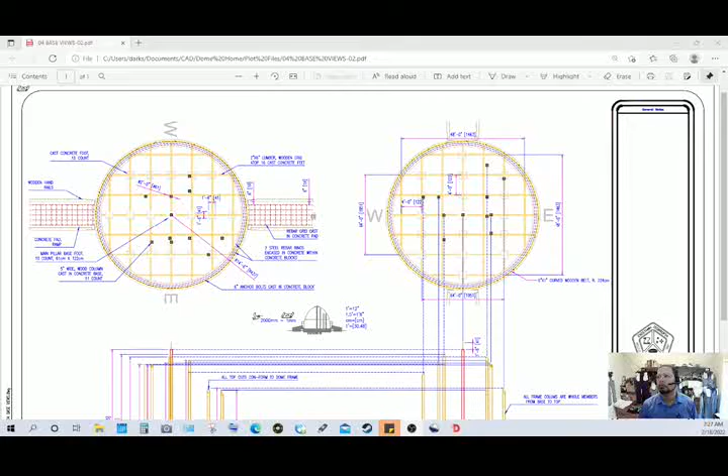I'd like to discuss today sheet number 4.

Sheet number 4 is very, very important because it contains the foundation, the base, as I call it, of the structure. And it begins to basically take a look at the...

...architectural and engineering aspects of the design of the drawing of the structure, and this is, I believe, where you begin to look at...

...the very building concepts, the various building concepts that will enable you to build this dome.

As you can see, it has a top view or plan view in two directions for reference purposes, and it has two side views.

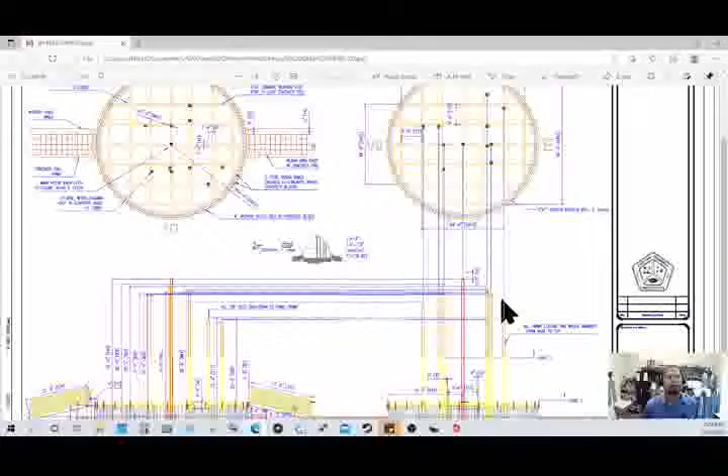I have lined up the pillars or the columns. These are the main pillars. I have provided lines there for reference,

so you know exactly what pillar is being referenced at any given point. I believe that to be important.

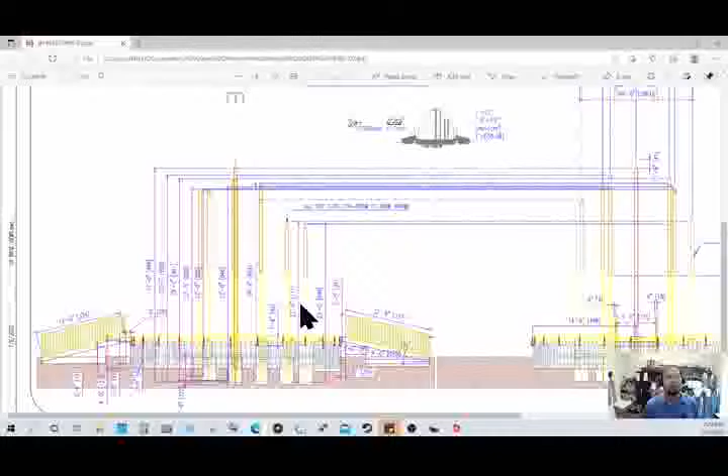And as you can see, there are only two side views. I did not go ahead and, like other sheets, provide four sides, four views. I don't believe that's necessary. Two views from two sides I believe to be...

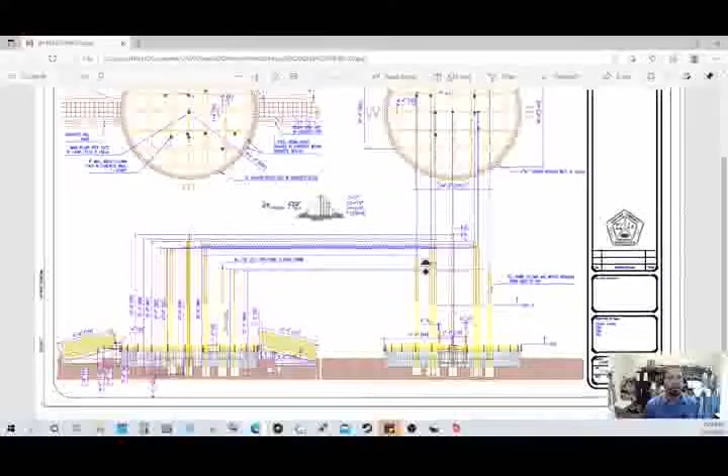...plenty enough for construction, for review, for analysis of these plans. So we'll begin...

...taking a look at this aerial view, or top view, or plan view of the base, what I call the base. Some other people may call it the foundation.

And as you can see, there is a grid here of about... the dimensions are here provided on this side.

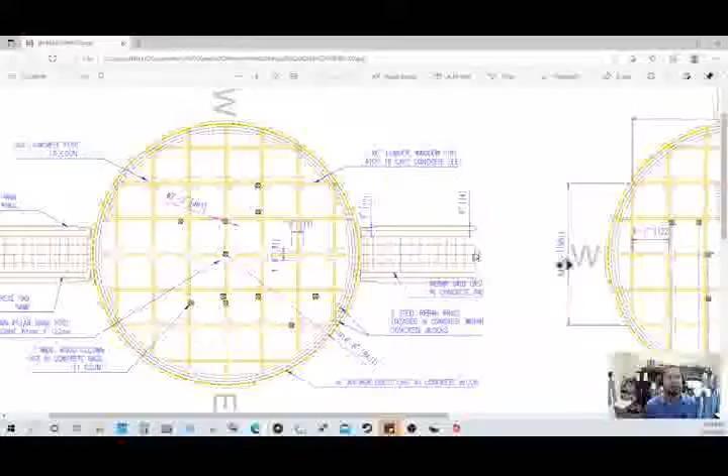4 foot, or 122 centimeters, by 4 foot, or 122 centimeters squared. So it's a squared grid.

And the reason I chose to do that instead of a more fitting polar array of members...

...is for the ease of construction with available materials. Again, I designed this dome to be as accessible for building and construction to the most...

...variety of economies, people, economic levels, to the largest variety of people.

Therefore, I attempted to maintain simplicity as much as I could in the areas where I could.

So I did that on the inside, beginning with the floor framework. These are 2x6 lumber, or designed to be 2x6 lumber. Of course, there could be other fitting material.

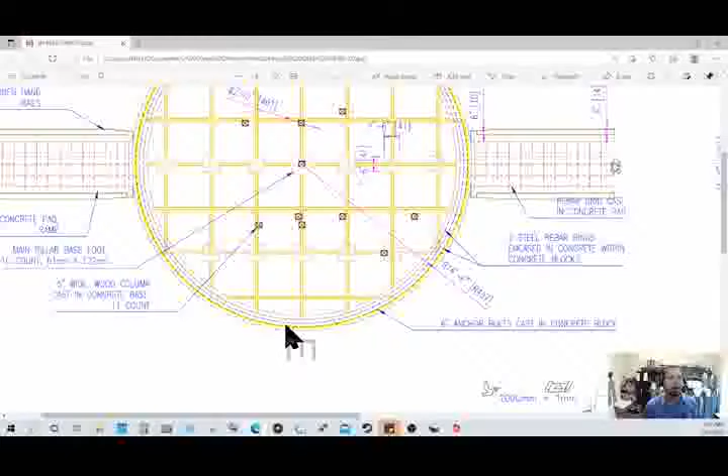And again, as you can see, they overlap into these blocks, this array of blocks, which I discussed earlier. But these are an array of blocks all around the structure.

I'll show you here in this view what they look like as viewed from the side. They're laid flat on the top.

If we take, let's say, one, and they're laid or erected up - these are two blocks, and this is another block laid flat.

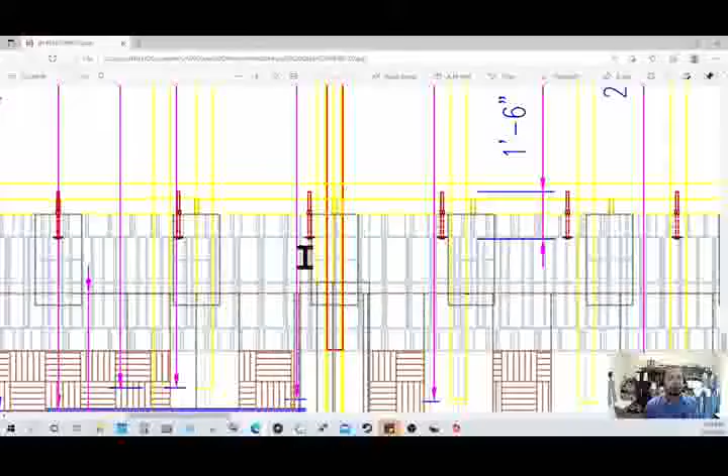If you look at the side, you can see more or less what those would look like when arrayed in that fashion.

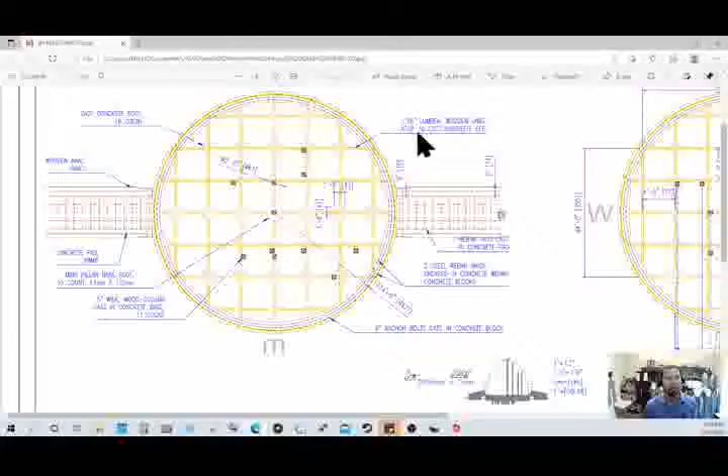And of course I detailed what these are: 2x6 lumber wooden grid atop 16 cast concrete feet.

I call them cast concrete, but they are actually designed to be blocks arrayed or stacked on top of each other - 8 of them, 4 on top, 4 on the bottom.

But they also could be cast concrete - that is a choice. As you can see, these overlap and rest on top of these, as well as each one of these.

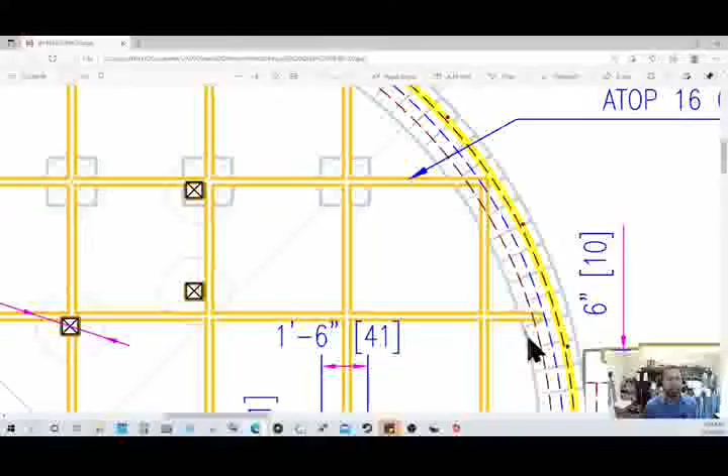These threads rest here. There's a small problem here that I need to fix. This needs to extend all the way up front. I believe it didn't because of perhaps the entrance, but I don't believe that to be necessary right now.

I think with the design, the changes I've done, this could rest all the way here, just as these do.

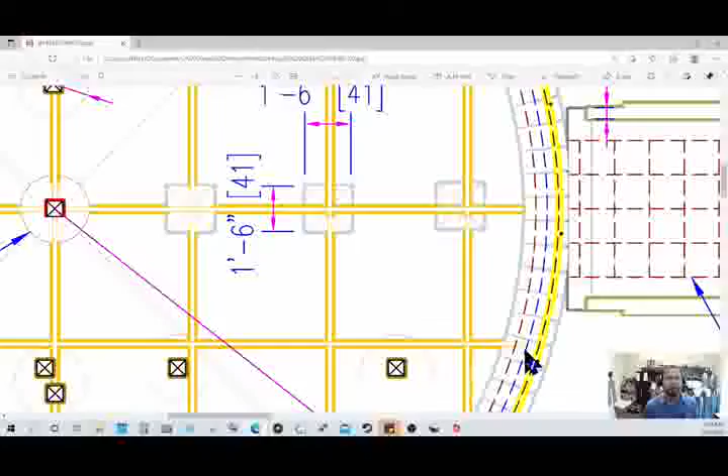And again, you can see the different columns or pillars. These round feet, bases, as I call them, are the concrete...

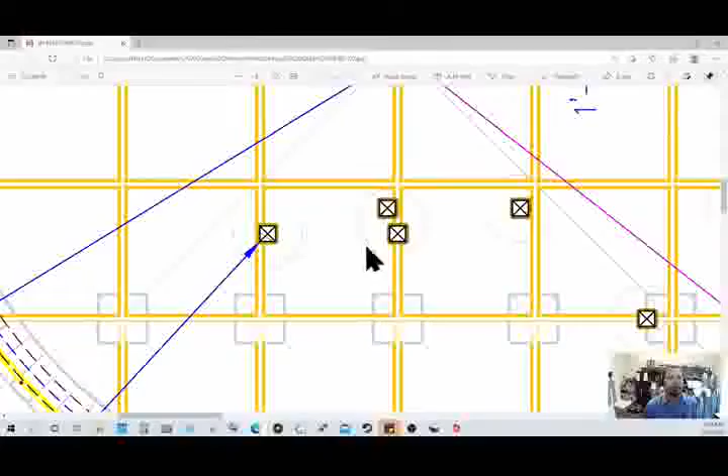...footings or feet. These large ones here...

...that go deep into the ground to provide for stability.

Again, these provide stability. As you can see, they are buried in the ground entirely, with the exception of the center one,

which is this one that goes - I believe there's a mistake here. It should go all the way. Actually, it does show as going all the way to the ground level.

No, more than the ground level. It should go all the way up here in line with this. So this is actually an error, a drawing error that needs to be corrected.

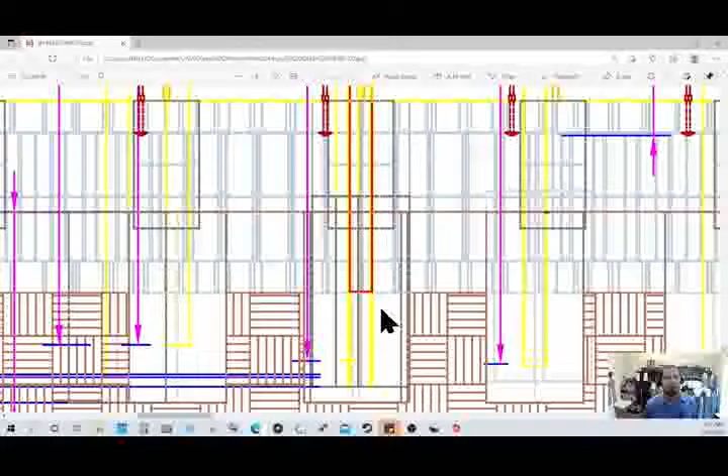This center pillar that supports this one member, the center one,

should be going from this depth all the way to this height, flush with...

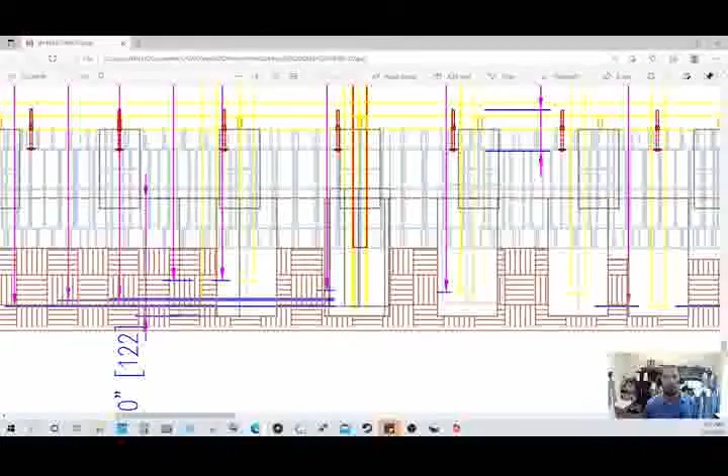...these smaller blocks or feet. And again, that's something I will address here shortly.

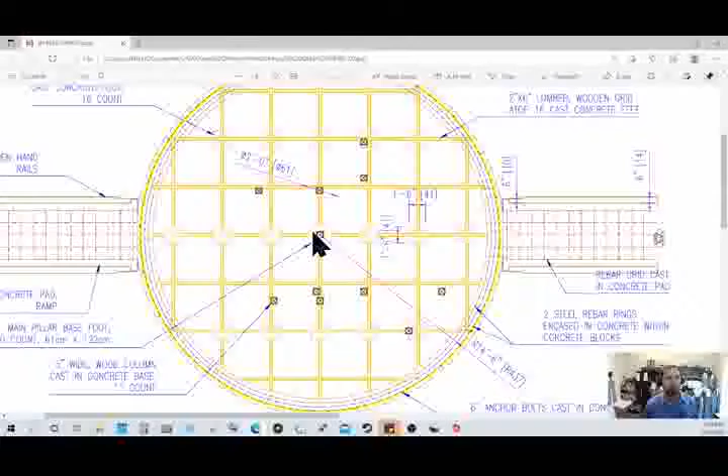And again, that applies only to this footing, because as you can see, the grid, the 2x6 lumber grid, rests on this as being replaced for one of those.

There's not one of those, so this takes the place of one of those. So these are going to be resting on that.

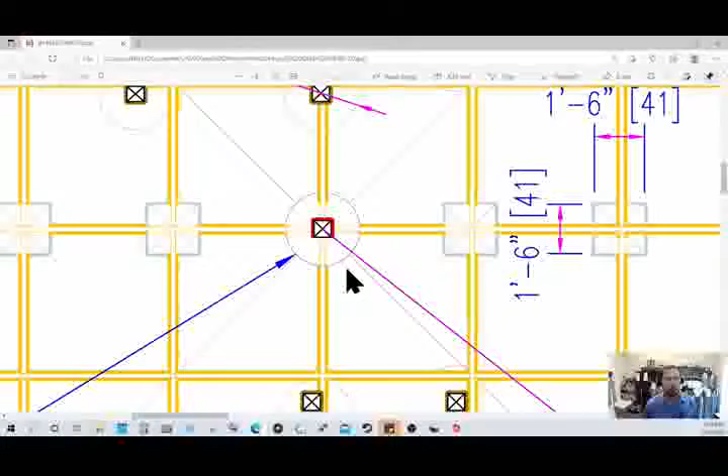So it needs to go all the way up to the level that these are, and all the way down to the level that these are, down on the ground. The very bottom should be at the level that these are.

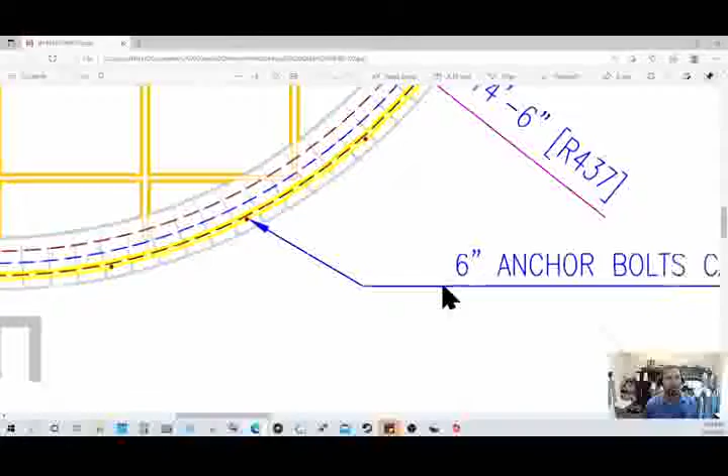These right here represent the bolts. I put them as 6 inch, but they're not 6 inch. They are about 6 inch plus 8, which is about 14 inches.

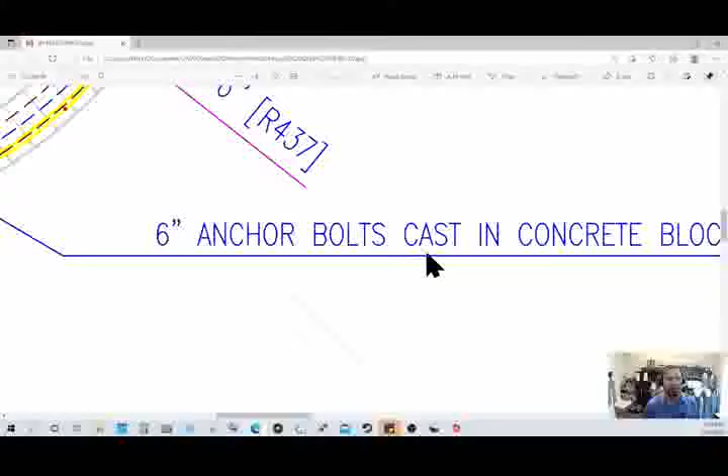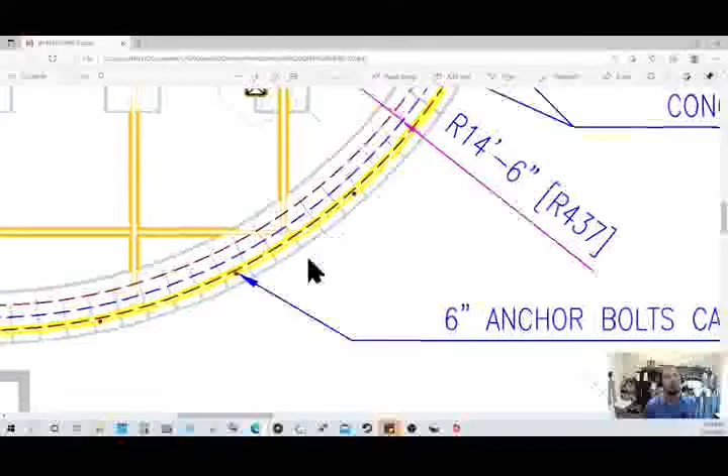So this is another error, another mistake. These are actually 14-inch anchor bolts cast in concrete. Actually, they're not cast, they are inserted in a hole or bore provided in the concrete and tightened with a nut and washer, perhaps also a lock washer. I believe there are about 24 of those.

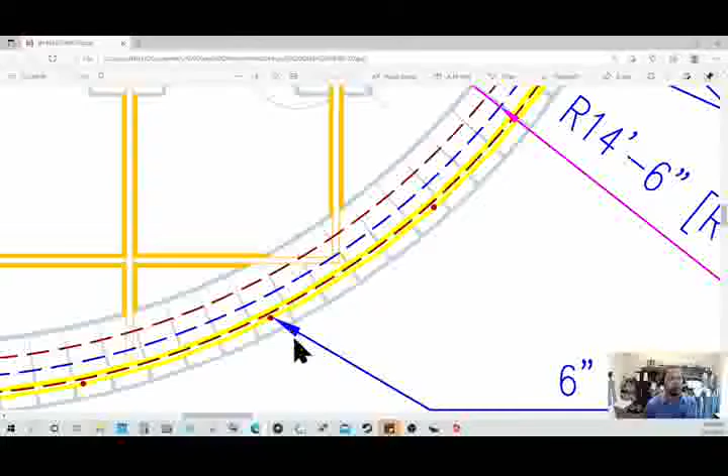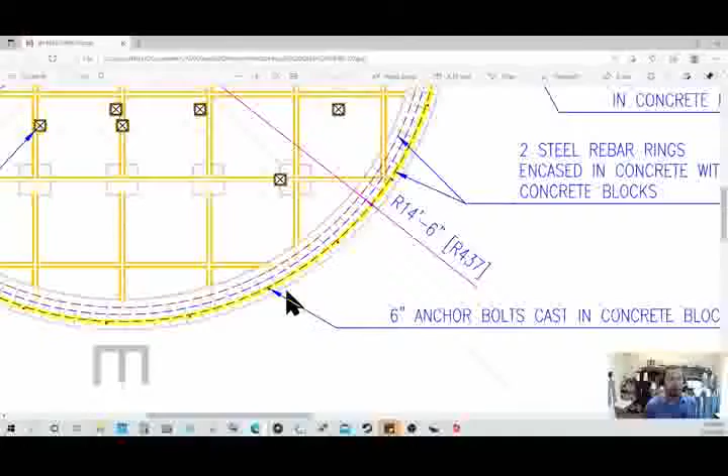What they do is prevent the bottom part of the dome, the bottom belt of the dome, from spreading out, which is represented by this yellow belt right here. It's designed to be wooden, made of lumber, I believe 6 inch by 1 inch. These hold it and help it maintain that round or circumference shape. You can see they are all around.

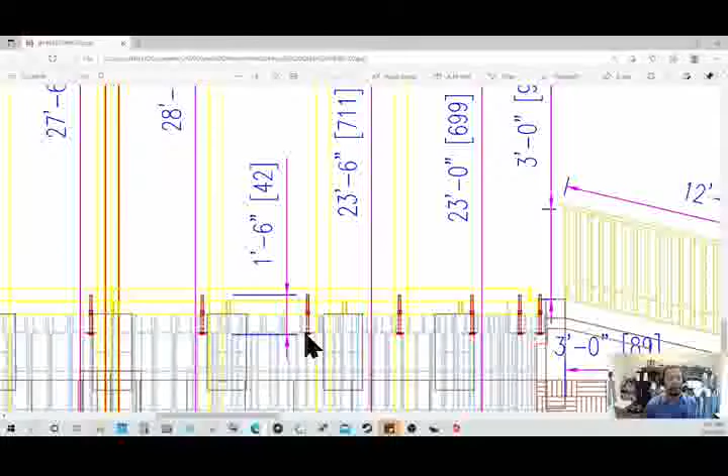There are about 24 of them, and they again are bored into the concrete. A better view to explain it a little better: they are shown right here from the side. You can see they appear like carriage bolts, they may be just that. If I dimension them correctly, they are 1 foot 6 inches, so they are 18 inches actually, or about 42 centimeters.

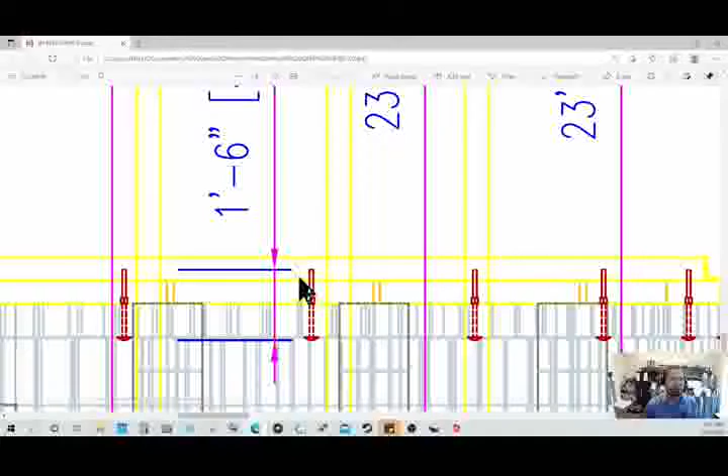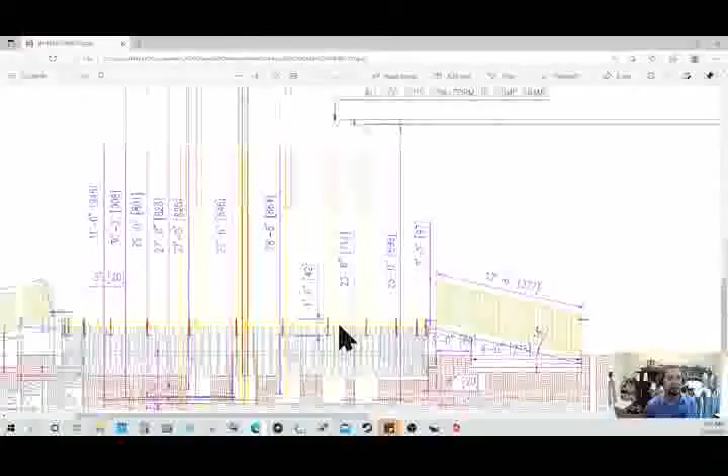In reality, I believe they do have to be about that long or even longer, because there's not only one 6-inch belt, but there's two stacked on top of each other, so we're looking at 12 inches worth of belt. I did go over that on the 3D model video that covers this part, so if you haven't already, take a look at that for the 3D explanation, which may be a bit more informative.

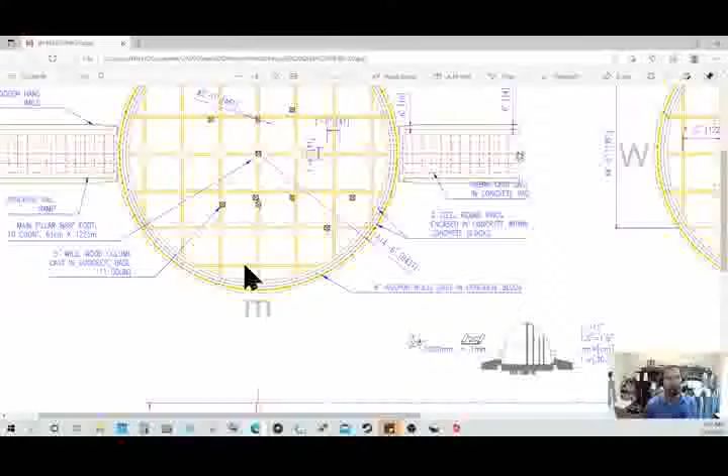But as you can see, there are a few things that need to be corrected on the drawing itself. These again are not 6 inches, they're more like 18 inches. So that needs to be corrected.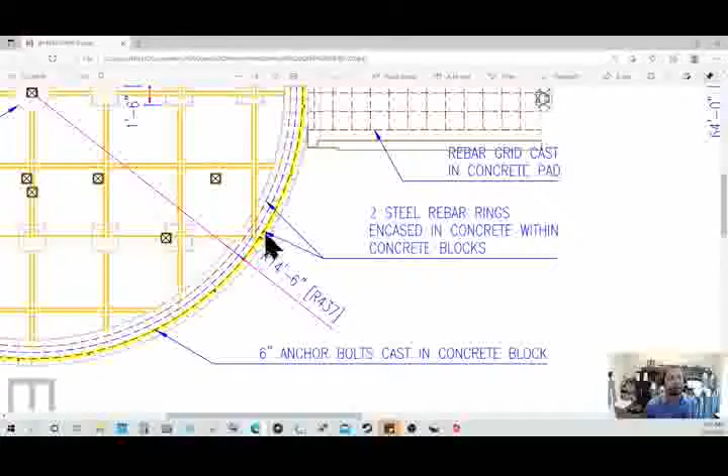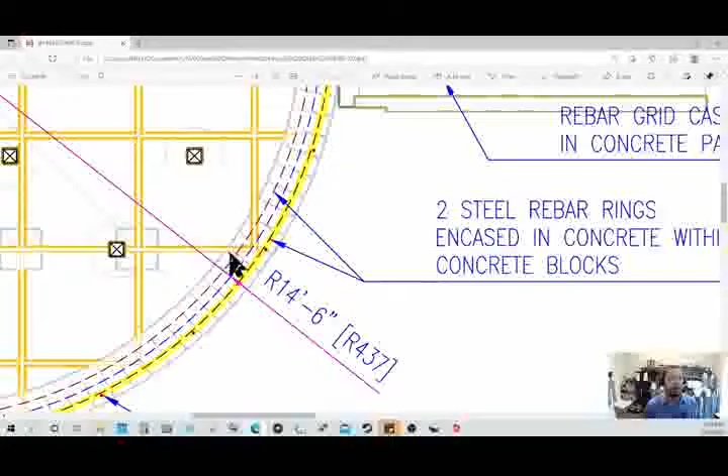For the first time I'm going to explain on this drawing these two steel rebar rings, or they could also be steel belts. The blue line shown here just shows the center of this array, but these two red ones represent steel belts or steel reinforcement, which could be rebar, long strands of rebar curved to take that shape, and somehow inserted into the blocks and basically filled in with concrete somehow.

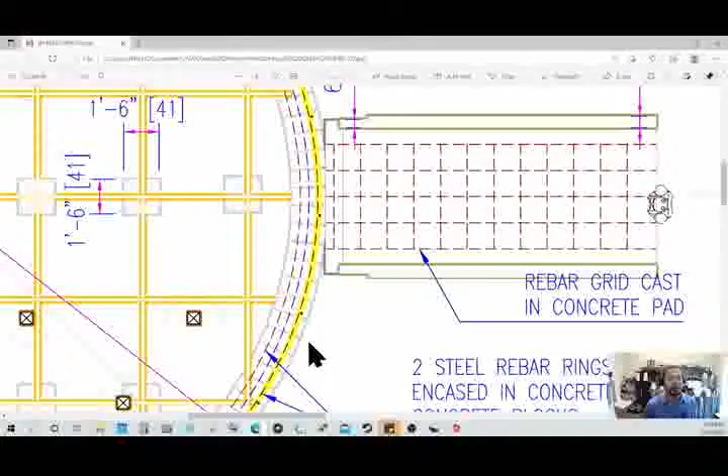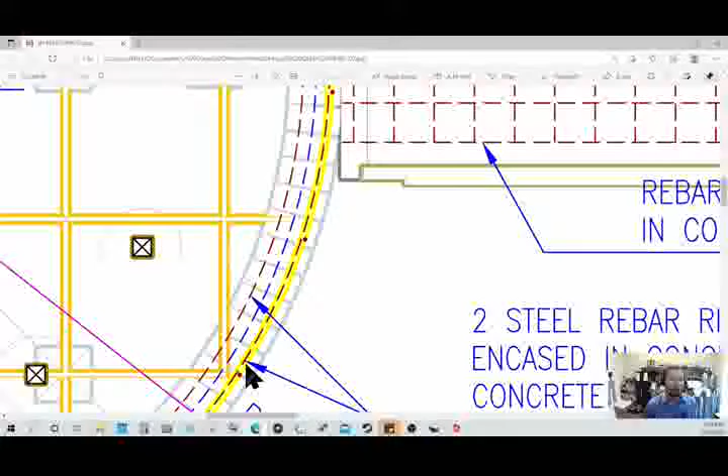This could also be a cast structure. This entire circular array could be a cast concrete structure, in which case it would be a lot easier to insert these two steel belts. The reason these two steel belts are there is to provide coherence and structural strength to this array, because as I mentioned before, just mortar and blocks may not be stable enough over long periods.

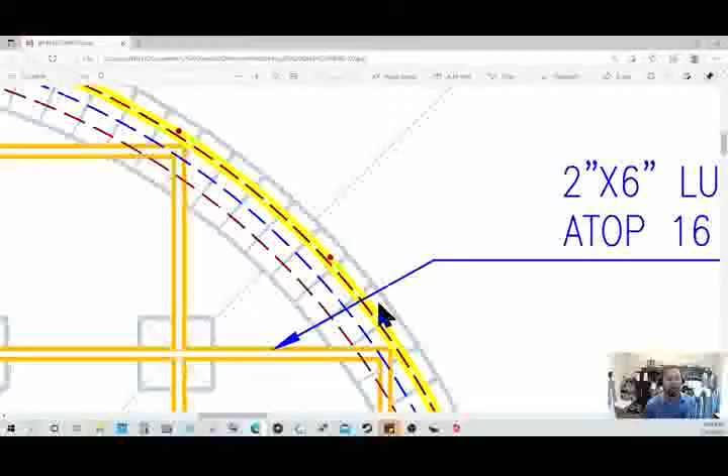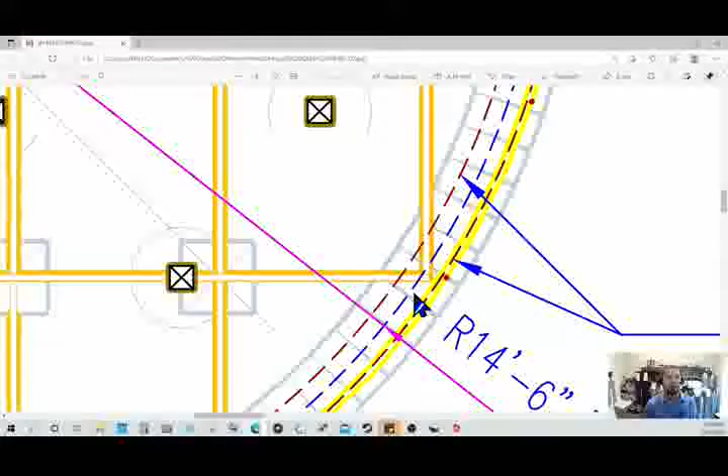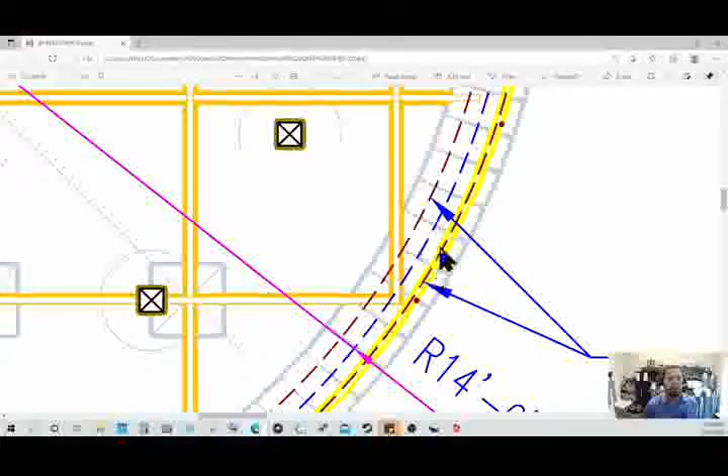Of course, the ground is slightly moving everywhere. You have to build with that in mind, that the ground moves over time, although it's a very minute movement. But the soil vibrates, and when it comes to temperature, it does breathe - in other words, it expands and contracts with temperature and humidity. All of that plays a part, and over time these bonds could crack, come apart, and you can have blocks coming loose if it's not for these steel belts or steel rebar or reinforced bars.

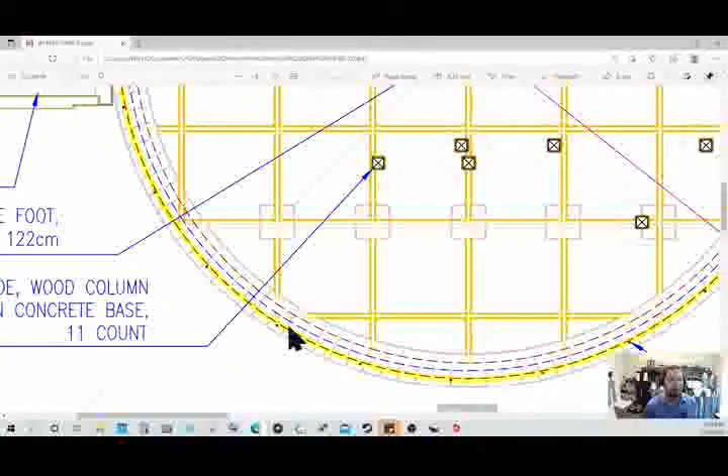So that could be a challenge, putting those bars into the blocks and then filling them in. Or it could be something that a method could be developed to where it could be an easy thing to do.

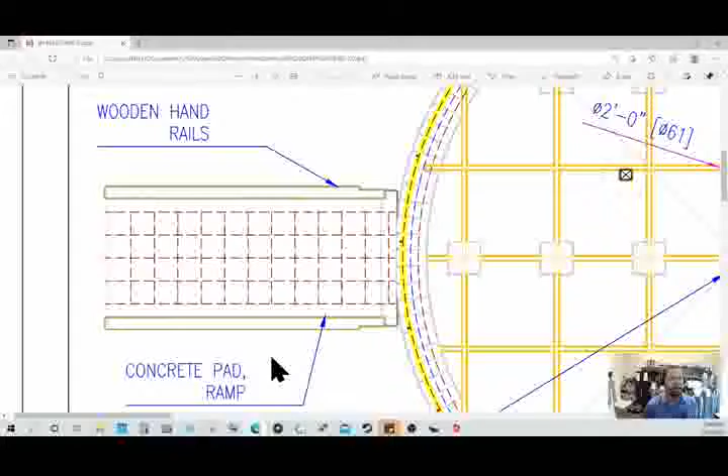These red dashed lines here are rebar reinforcement for this concrete pad, this concrete pad ramp as detailed here. And I should show those here as well - that's something missing in the drawing. This is the pad right here, and in the center of that should be a line representing that grid, that steel rebar grid. It should be shown right there.

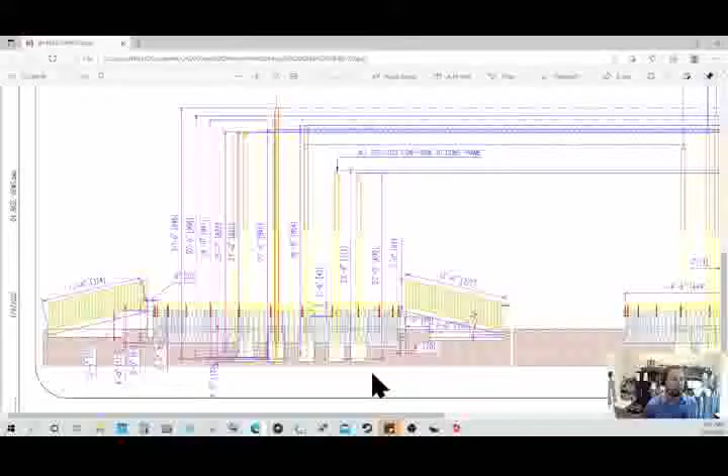Again, that's for structural integrity. You're going to be walking up and down, perhaps rolling some heavy furniture or equipment up and down this, so you don't want it to just be concrete. You want it to be reinforced.

As you can see, it does have a wedge here that supports it. This is presumably also concrete filled in. But I believe if you reinforce it, even with thinner or smaller gauge diameter rebar, it would be very advantageous to do so.

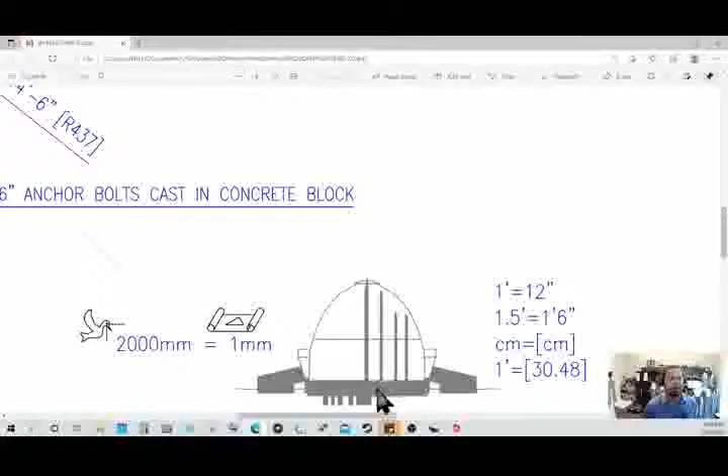As you can see, the view here shows this is filled in. This is what is shown in these views, mainly the base, the foundation. And I did include these columns in these foundation drawings because they are cast in concrete. These columns, or pillars as I call them, they are all cast in concrete.

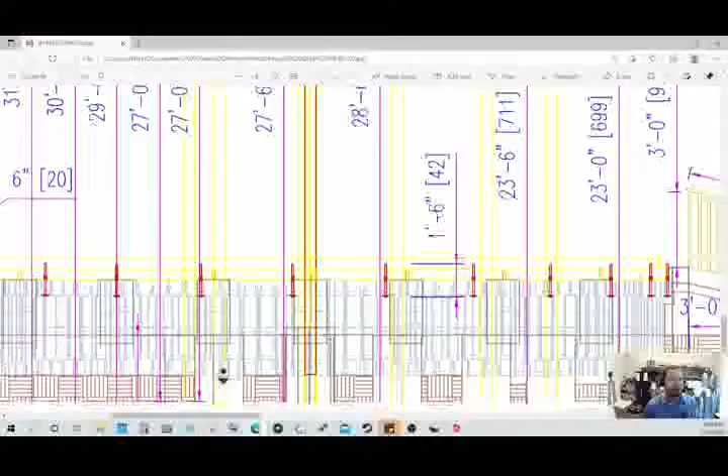And these round cylindrical concrete bases or feet. These right here. Not these. These are the block footings, the eight block footings. These are the larger cylindrical feet where the pillars are encased in,

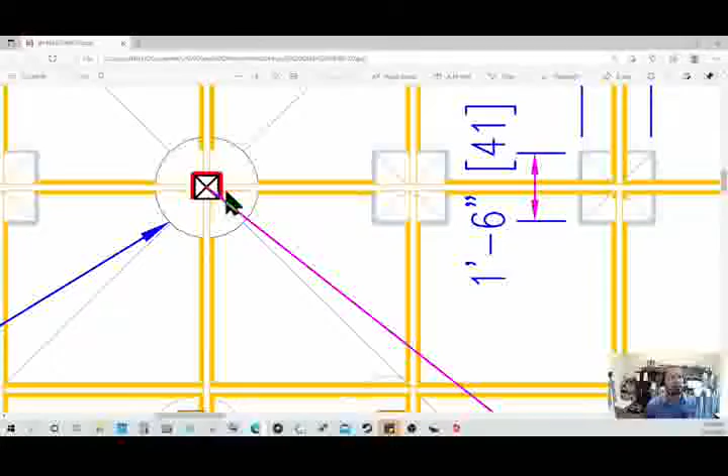and these are most likely to be cast concrete or poured concrete, poured into some kind of mold shape cylinder with the pillar or column already in it, perhaps with some sort of hooks or like a piece of cross wood, or a piece of wood that's crossed into the pillar on the bottom where it's cast in concrete for stability, so it doesn't just come loose and could be easily pulled out.

Although gravity will hold it in place, I believe nothing's gonna just pull it off straight up. It would have to be straight up if it didn't have some sort of hook or cross member here, like bolts or pieces of steel, steel shafts or steel cylinders crossed across these embedded parts of the column right here. It could be not too many, maybe like 3 crossed in different directions.

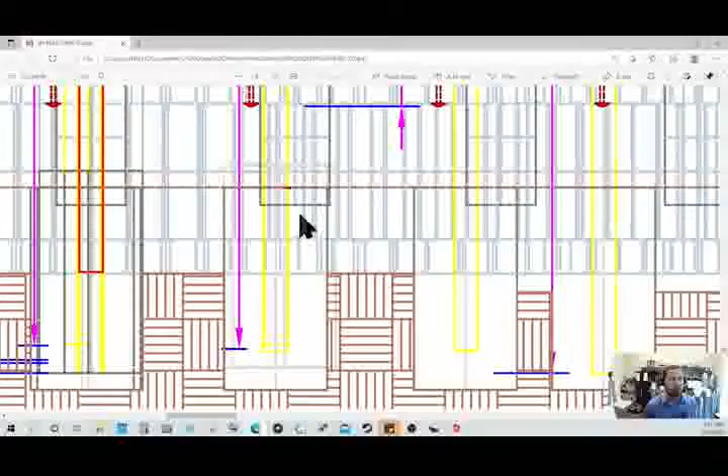Again, to provide a grip so they can grab onto the concrete and not allow these to rotate or be pulled out, which again is very unlikely, but I believe that adds to the stability, to the structural integrity of each pillar, and by extension the entire structure.

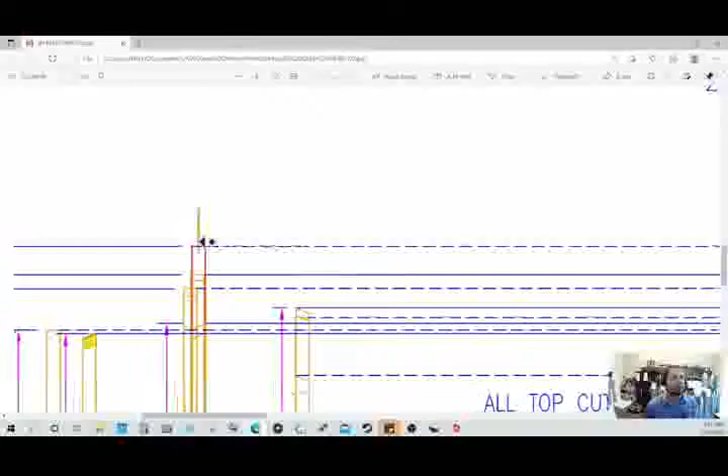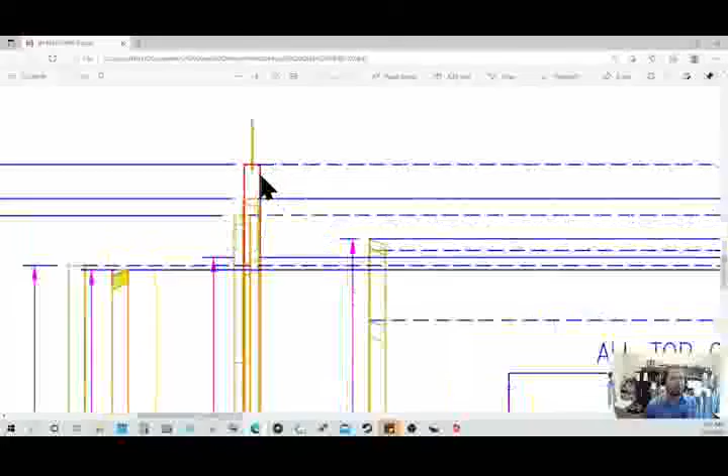This right here is a representation of the copper lightning arrestor. This is the tallest, highest point of the structure, and I believe a lightning arrestor is something necessary there. So that's represented there. Of course, it would be electrically bonded all the way to the ground, electrically grounded, and going into the ground, perhaps to another electrode or copper shaft, steel shaft that goes deep into the ground, at least 10-12 feet.

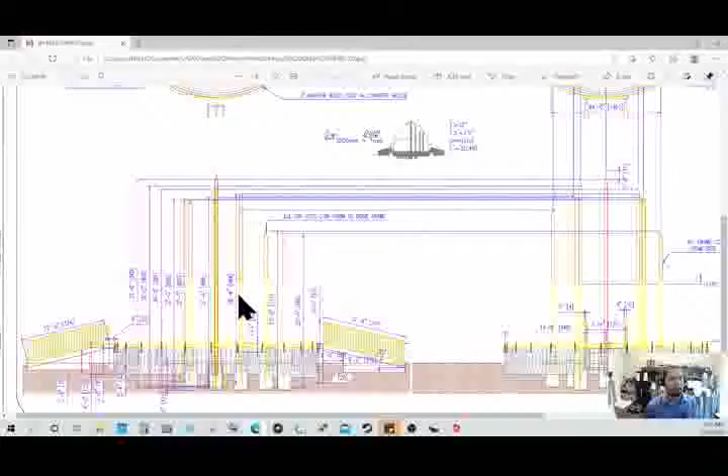This is the ramp, the side view of the ramp again. As you can tell, this wedge piece here is presumably solid concrete, and as you can see, it's buried in the ground a few inches at least, perhaps 8 to 12 inches. And as you can see, even this part here is partly buried here towards the end, so this could be flush with the ground. This represents the ground level.

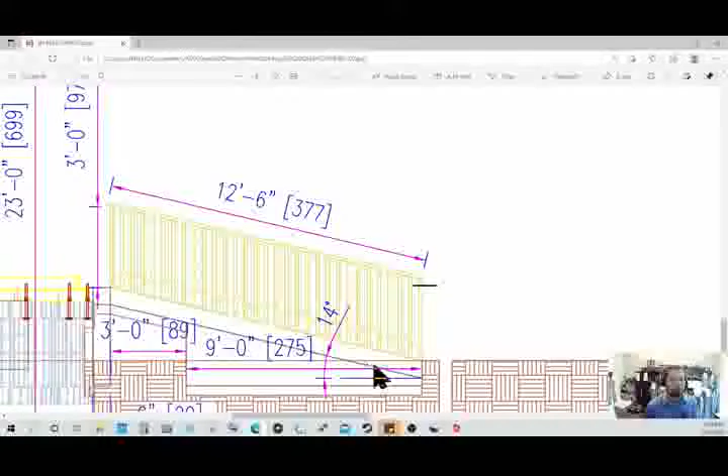And as you can see, the ramp ends at ground level right there. So from this point down, it's buried. So you can see quite a bit of it is buried into the ground. I believe I may have provided dimensions for that. Maybe on this side. I provided dimensions for the structure, but not for the depth at which it is buried. Maybe I should provide that in a later version of this.

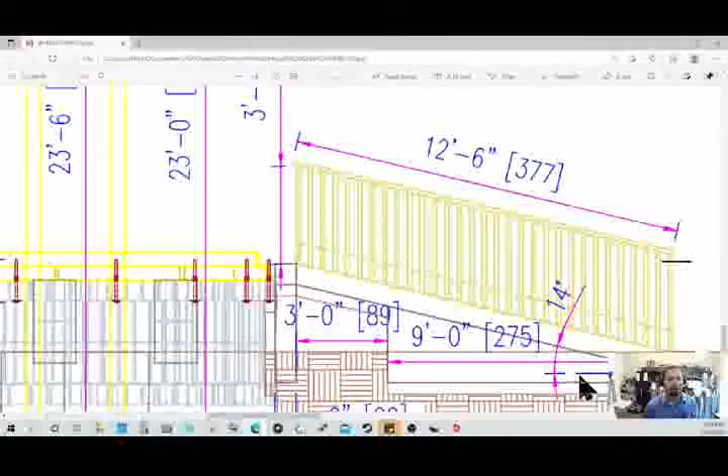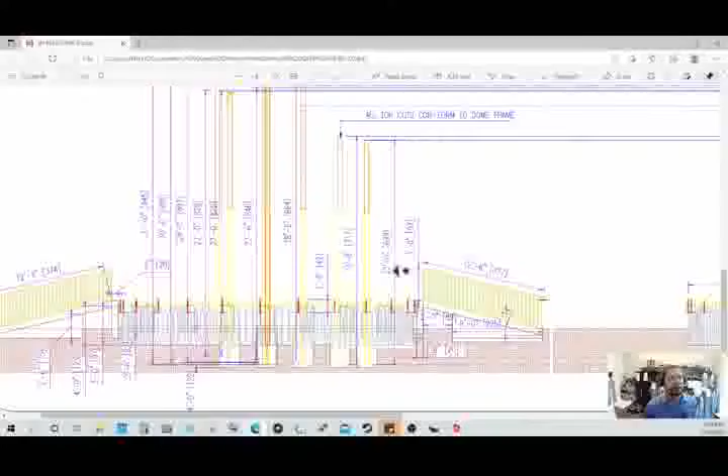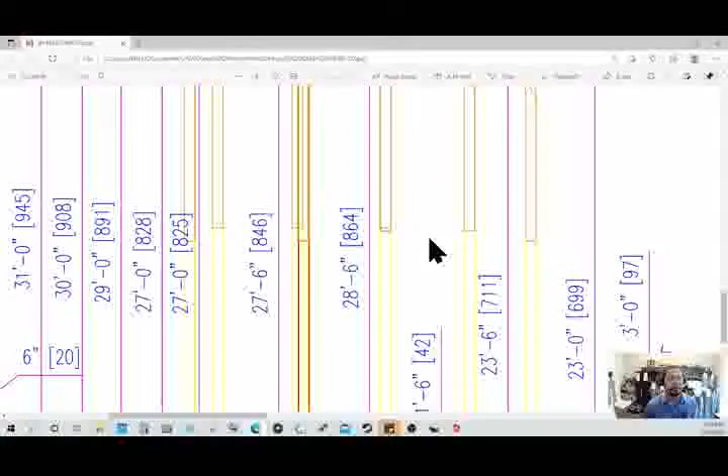I provide the angle at which this is built, 14 degrees. The length of that rail, which is presumably almost the same length of the ramp itself. I also provide the dimension for each one of the pillars or the columns. Again, these seem to be divided right here, but that only shows the floor level, more or less. These have been changed, updated since this drawing was made. So they should all be at the same level.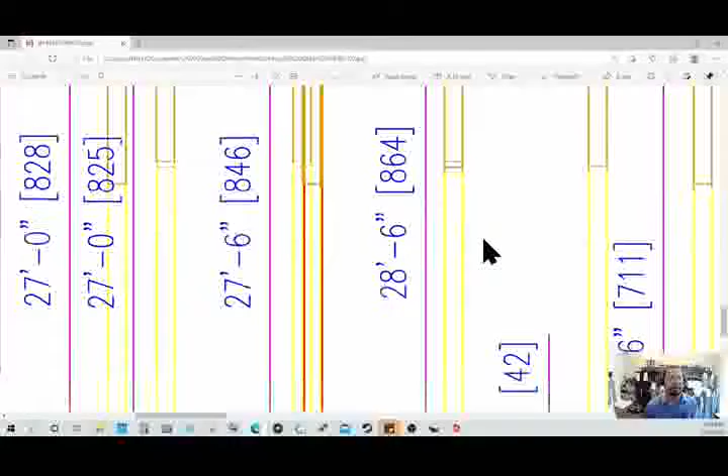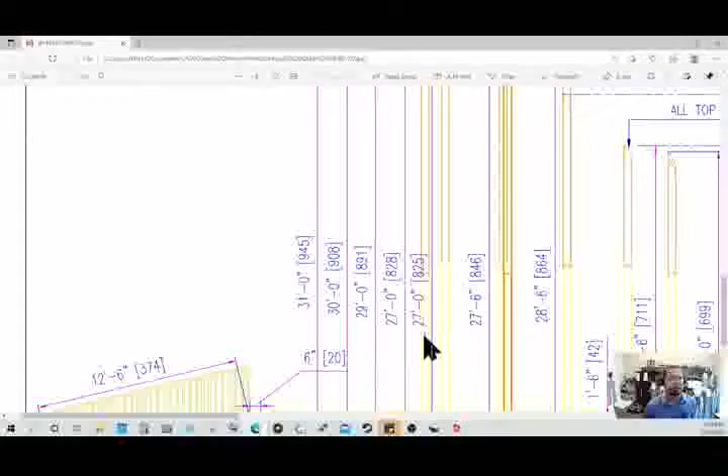And all they do is show where the ceiling line for the first deck is. They don't show where they should be cut or anything like that. These are whole members, should be whole members, to provide the greatest structural integrity for the dome. And as you can see, the tallest of them is about 945 centimeters, 31 feet. And they go down from there.

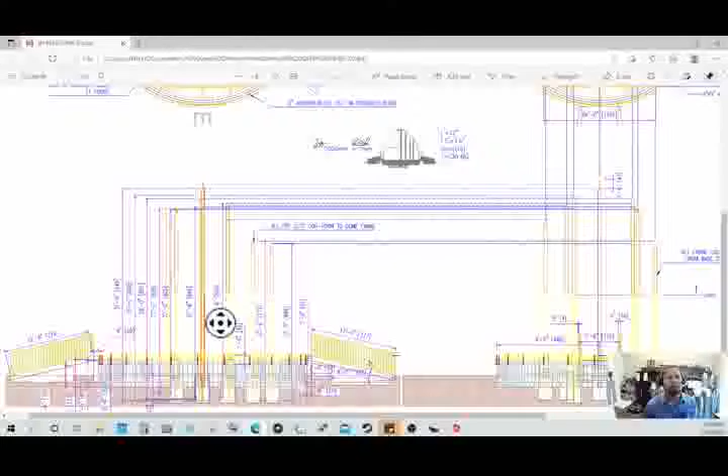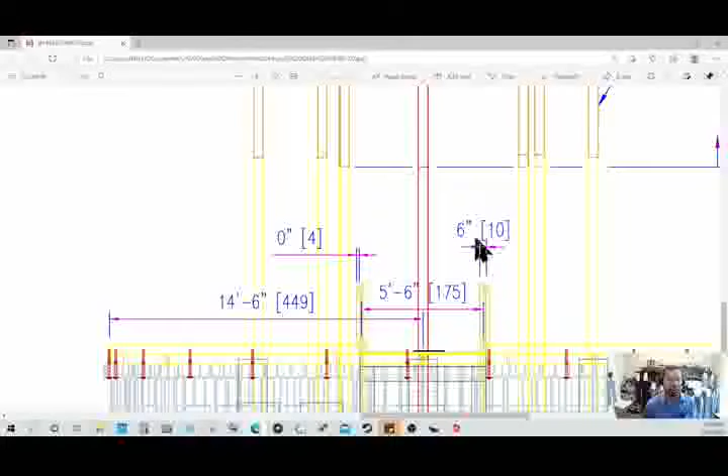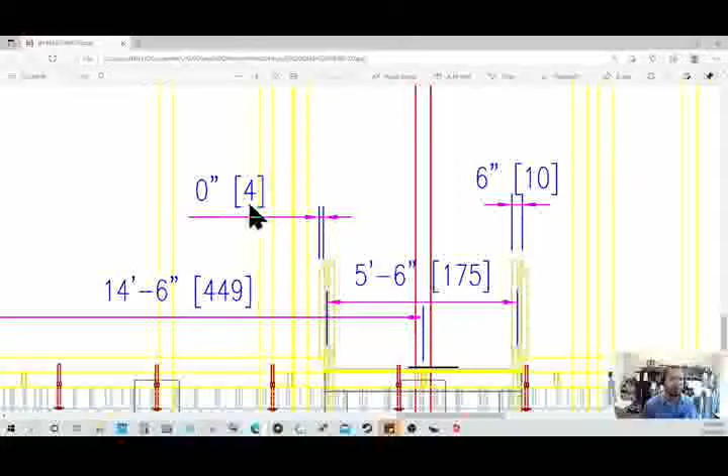Various dimensions for various different parts. I would focus on the centimeters part of the measurements, because I believe the minimum measurement as set up in the dimensions is 6 inches, but this could be less than 6 inches, as this one is. It shows 0, but in reality is more than 0, of course, since we have 4 centimeters. It's perhaps 1 inch, less than 2 inches.

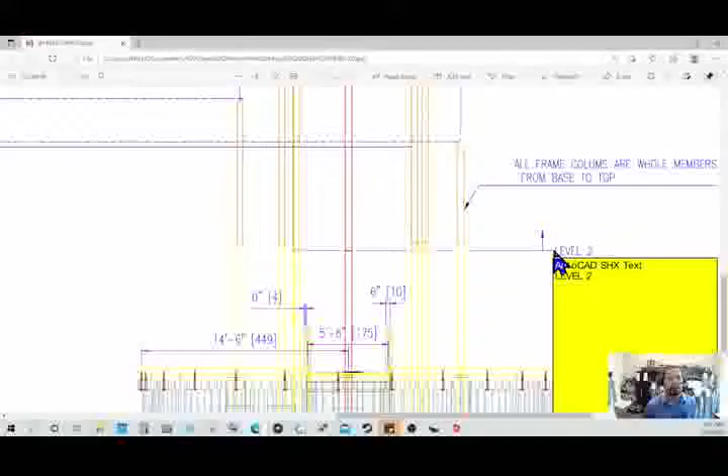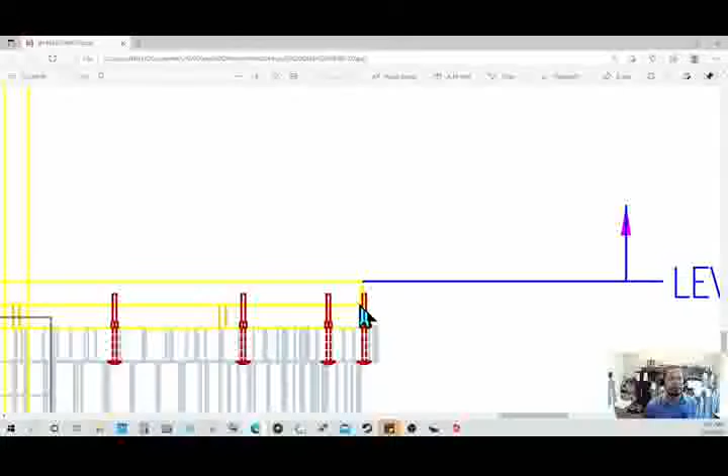And again, this is the line of the second level. I'll call it deck. First level is from this line and up. And in reality, it's more from this line right here that needs to be adjusted, changed. This is more like the floor level right here, right in between those two 6-inch belts. This line right here more actually represents the floor level. And again, these columns are whole members from base to top.

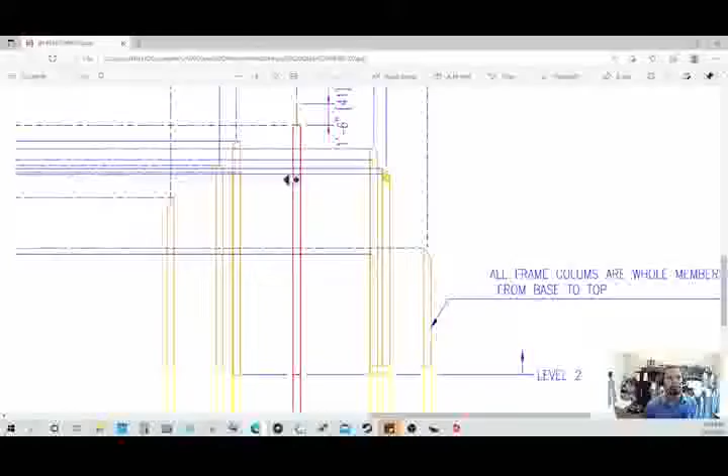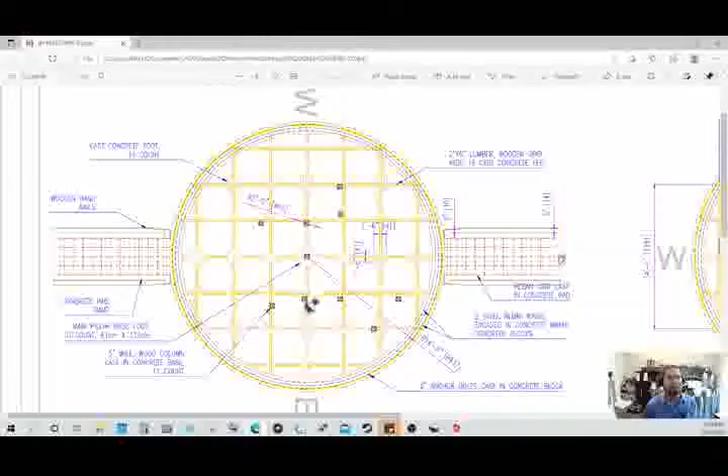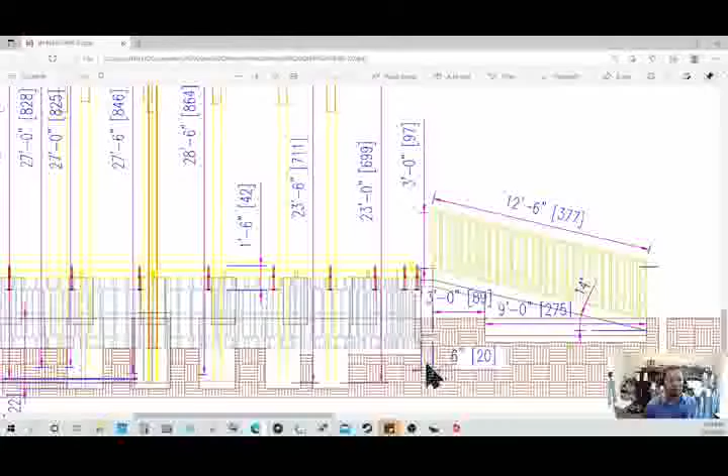And that pretty much wraps it up. That pretty much explains most of the aspects of the base plan, which again is also known as the foundation plan. This is designed to be built on packed ground, not necessarily anything else like concrete. This could be built right on the ground as long as it's packed. This represents packed ground, compressed ground.

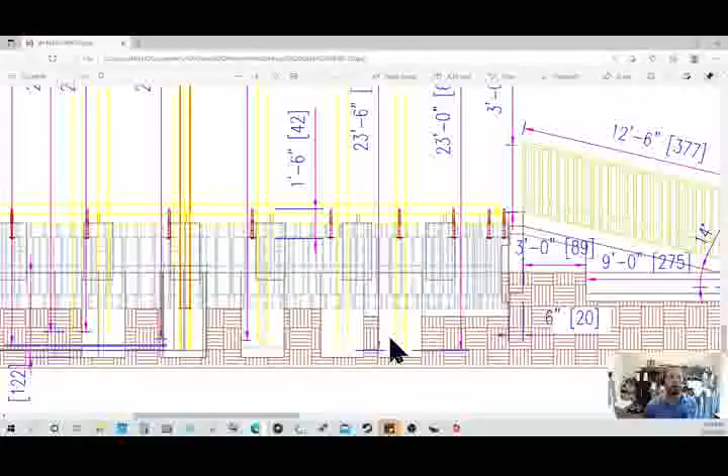You want it to be quite dense, so it can provide the most amount of friction, therefore stability, vertical and horizontal stability for all the members, especially these concrete footings, which provide a lot of the inside support for the inside structure. Again, that's sheet number 4, or the base plan, or the foundation plan.